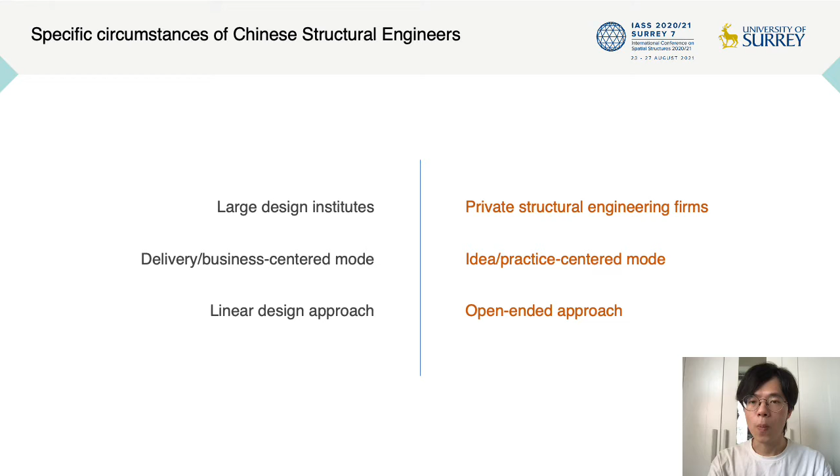One notable example is the collaborations between an emerging Chinese structural engineer named Zhang Zhun and many star architects. Through archiving all projects of Zhang Zhun, we noticed that an open-ended design approach is emerging. Taking Soft Matter Pavilion as an example, I will present one of the models of collaboration developed by Zhang Zhun and Chinese architects. Soft Matter Pavilion was built for an outdoor exhibition which was located in Shanghai Lingang New City, one of the largest reclamation areas in history.

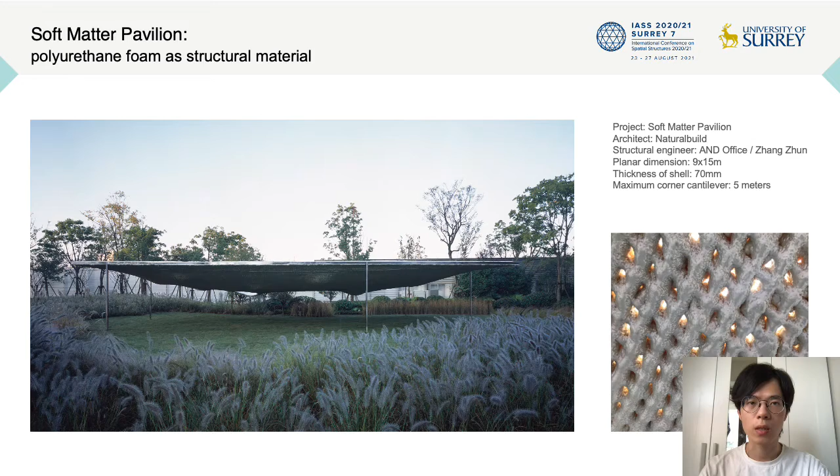To respond to the ambiguity between nature and the artifact of the site, the architect proposed a basic architectural prototype, a canopy and a column. The canopy is made of polyurethane foam. When it is sprayed, polyurethane foam rapidly hardens and expands, getting a bubble-like texture. And a cloud-like shell with the unfamiliar texture and thin columns together shows a mysterious visual effect.

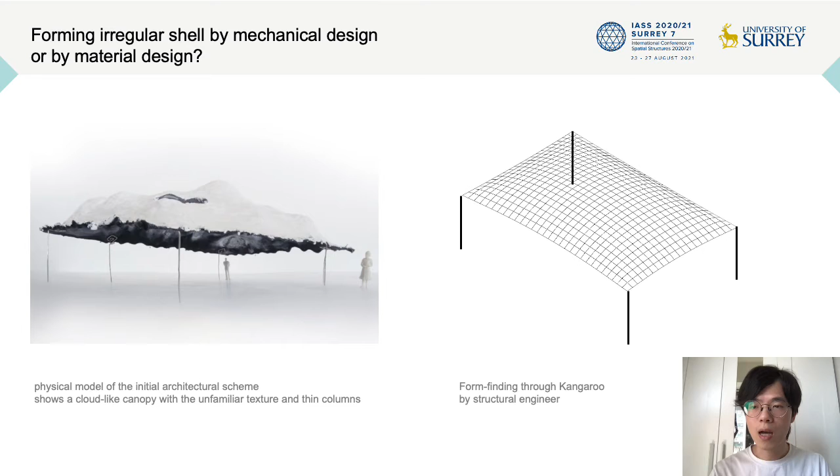The structural engineer firstly attempted to find form based on mechanical design optimization. He considered minimum columns and the curved shape of the canopy as constraints to find form by Rhino, Grasshopper, and Kangaroo. A pincushion surface was found. However, its regular surface is far different from the expected irregular surface.

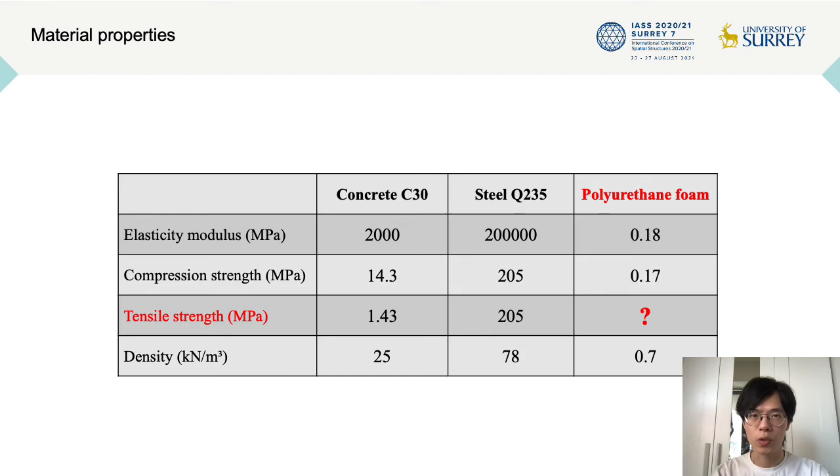Instead of searching for other schemes by mechanical design optimization, the structural engineer paid attention to questions related to material design and construction process. Polyurethane is light, but its material strength is too low to be a structural material. Meanwhile, how to not use complicated formwork during construction is also an issue. In this regard, the structural engineer proposed a scheme of material design that composited polyurethane with nylon net, which increased the elasticity modulus and the tensile strength.

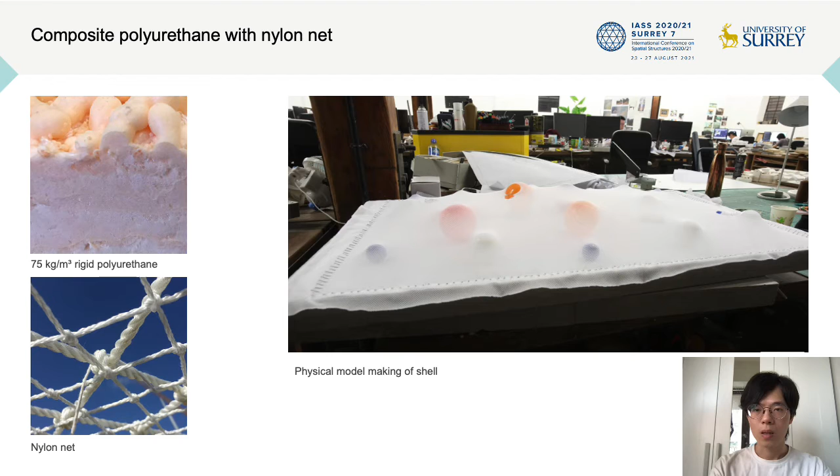Based on the method of physical model making, the structural engineer proposed the first scheme for the construction process. Firstly, distribute objects like yoga balls on the ground, covered with a nylon net to get the desired form. Then spray polyurethane foam on the nylon net. Finally, lift the canopy up to the top of the columns after the polyurethane foam hardened.

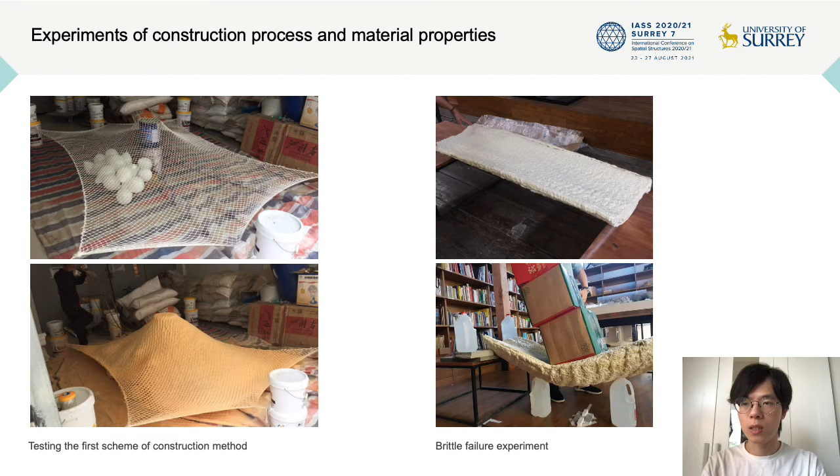Firstly, imagine that deformation and internal forces of nylon nets are caused by self-weight and external concentrated forces. Secondly, assume that there is no deformation and extra internal forces in the polyurethane shell when it is hardened. And finally, when polyurethane foam is hardened, remove prestressing forces so that axial forces in the nylon nets are transferred to the polyurethane shell as compression forces.

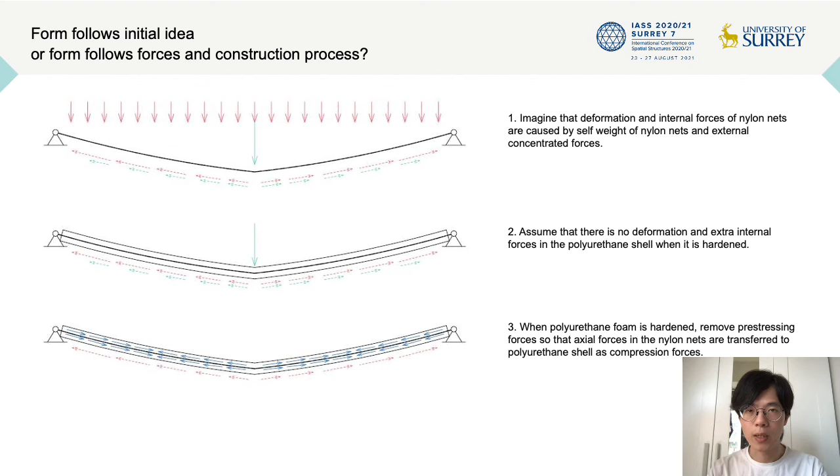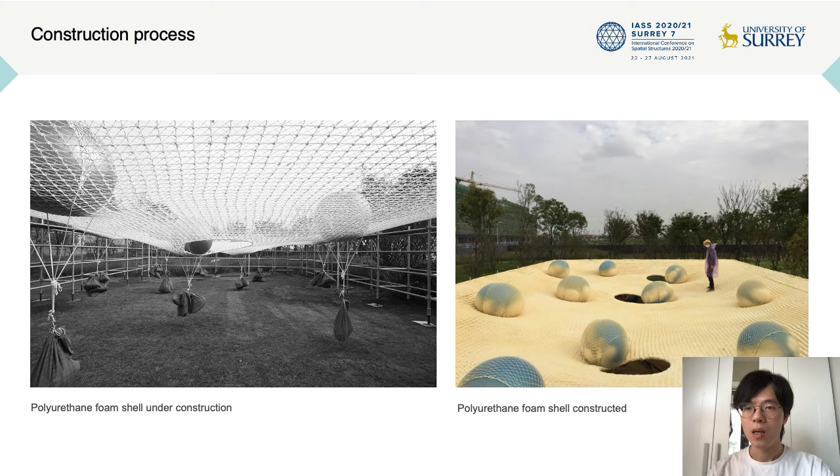In this regard, he proposed the second construction method. Firstly, tighten nylon nets on the top of a steel frame, distribute yoga balls on the top of the nets, hang weights on the yoga balls, and get irregular curves. Then spray polyurethane foam on the bottom of the nylon nets, then lift up and flip over the hardened shell, spray the other side of the nylon nets, and finally connect the steel frame with steel columns. The problem is a crane is needed for flipping over the hardened shell.

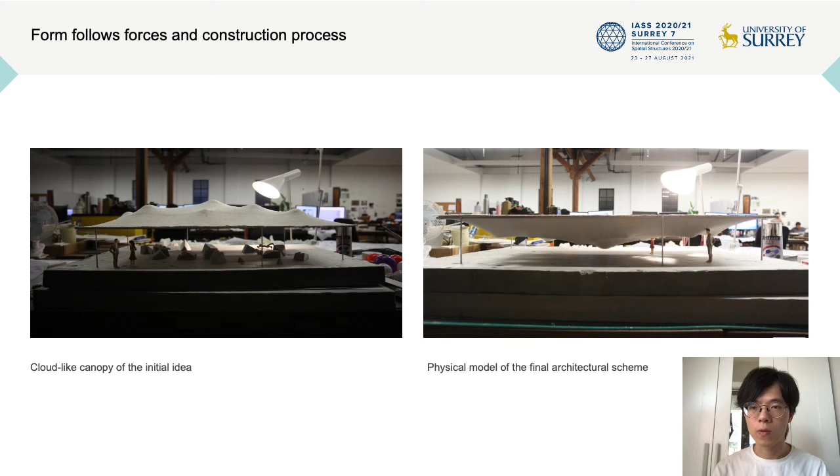At this stage, the architect made the decision to give up the initial idea of the cloud-like canopy and make the initial form upside down. This decision not only canceled the need of a crane for flipping the canopy, but also made the shell resist deformation of dead load during the construction process. In other words, the final form follows forces in the construction process rather than a predetermined idea.

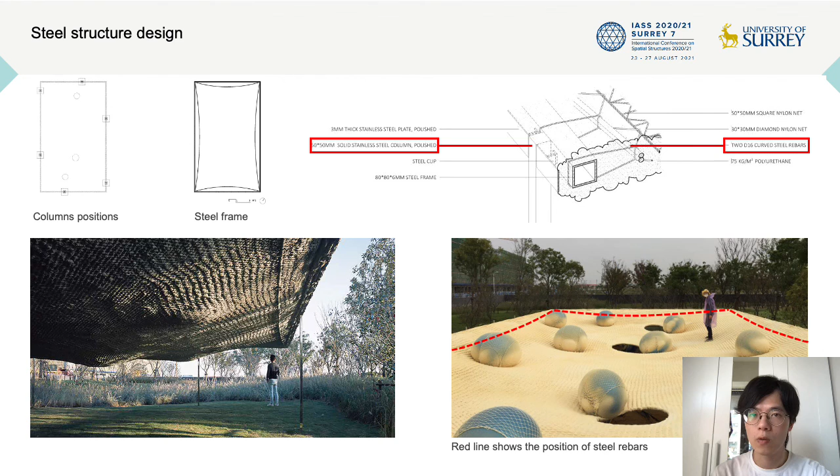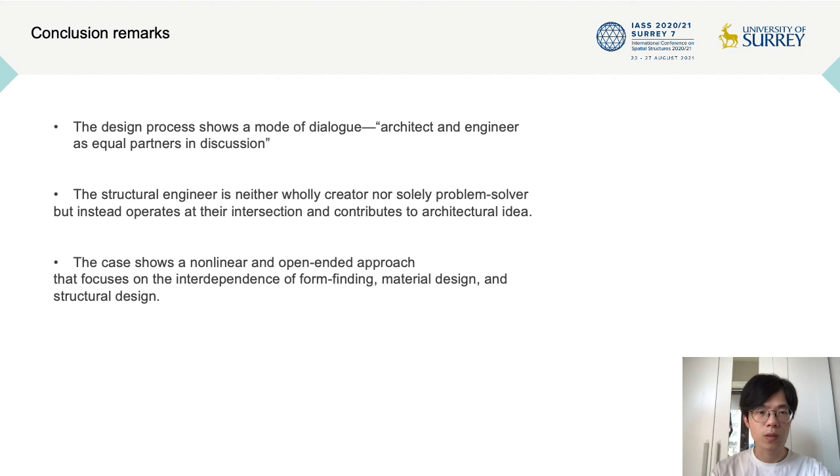The design process shows a mode of dialogue, architect and engineer as equal partners in discussion. The structural engineer is neither wholly creator nor solely problem solver, but instead operates at their intersection and contributes to the architectural idea. The case also shows a nonlinear and open-ended approach that focuses on the interdependence of form-finding, material design, and structural design.